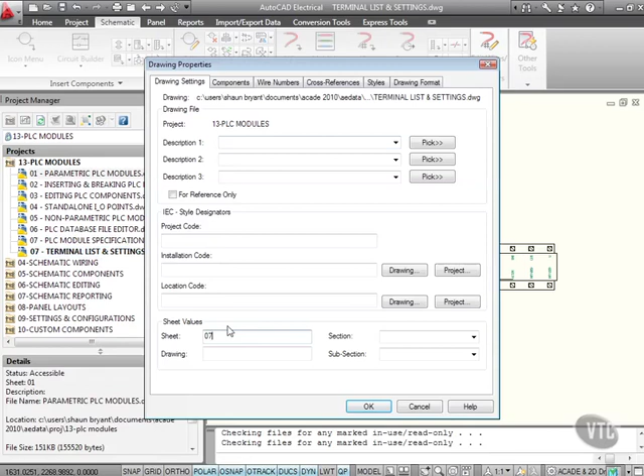When we're developing our own PLC module, we need to look at our terminal list and settings. So we've got a new drawing there. Again, right-click on the project, add active drawing, and yes to project default values. I'll just right-click on it there, properties, drawing properties, and we'll make sure that the sheet value is sequential, and OK that, and the project updates for us.

Now, we need to go back to our schematic tab. And if you remember in the previous exercise, we went to Other Tools, clicked on this flyout here, and went to the PLC Database File Editor. Now, we've already got that AWA that we created in there. And as you can see, it's right there, and I've selected it.

Now, here's our terminals here. Now, we've got 8 terminals to think about. So what I'm going to do, I'm just going to put some very basic terminal information in here, like so. So I'm going to click here, click on the arrow, and then slide up, and I'm going to go for module info input output there, point wire left. I'm going to do the same with this one, but it's going to be point wire right, like so. And then I'm going to do another one here, point wire left.

And I'm just going to keep going now until these are actually all filled in. So it takes a few minutes to do this while I'm clicking away here. So let's think about what we're going to do next. Well, we're going to look at our style box dimensions in a minute, because that positions where these terminals actually go on the block that gets inserted in the drawing. So I need another left there, like so.

And then in this one I need a right, so I'm just going to keep popping these in. And then we've got the last 2 to occupy, like so. So again, scroll up the list, I want left. And then last but not least, we've got the bottom one here. And we scroll up again and we've got right. So those are all added. Now, there could be a spacing factor there. I'm not going to worry about that right now.

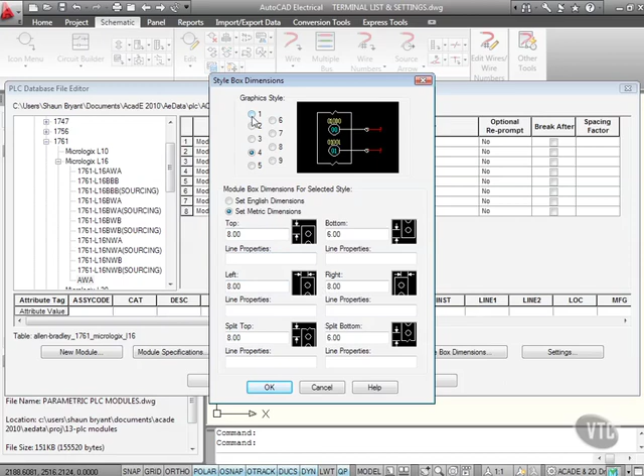What I'm going to do is do my style box dimensions here. Now, I'm going to go for a metric style box. And if I select any of these, can you see that they all have similar properties? So I'm going to leave them as they are. They're not really an issue, to be perfectly honest. So I'll go for graphic style 1 with metric dimensions there, and I'll OK that. So that's all been added. Now, if I hit done and insert, that will basically save what I've done and insert in the drawing.

Let's just check what we're doing here. Module specifications. Well, we don't have a description. We don't have a module type. We've got a code, so what description is it? Let's say it's an AB. Make sure your caps lock isn't on. That'll look a bit silly, won't it? So it's an AB, an Allen Bradley, and we'll say it's an AB

1761. In fact, let's put some underscores in there. It looks neater. So it's a 1761_L16_AWA. I've put all those underscores in there so that we can distinguish it from the actual ones that are already in AutoCAD Electrical. Now the module type we'll just leave as is, I think.

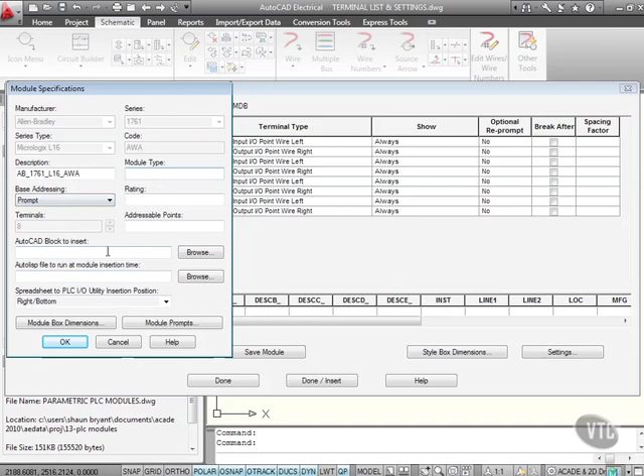Base addressing will prompt for it. We've got a rating, number of terminals. Again, I'm not worried about AutoCAD blocks to insert. I'm going to OK that now, and that's updated as well. So now what I'm going to do is save the module. That has now saved it, and then do a done and an insert. There is my AWA there, and there's my description.

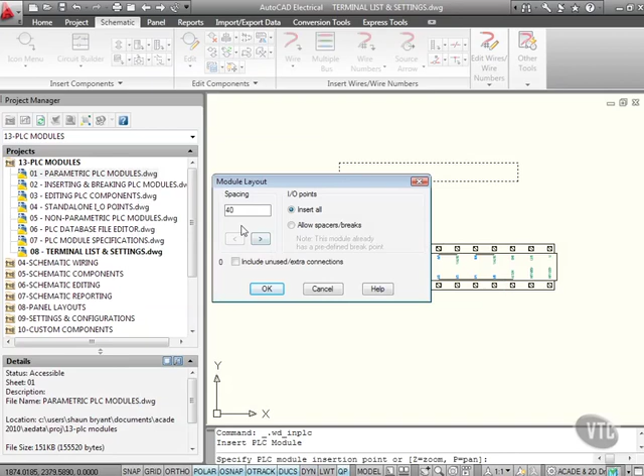So if I now OK that and bring that into the drawing, there's my X there because it's a parametric PLC module. I'll leave the spacing at 40 and OK that. Look. It's all kicking in. If I do that, there they are. I've created my own PLC module, my own parametric PLC module.

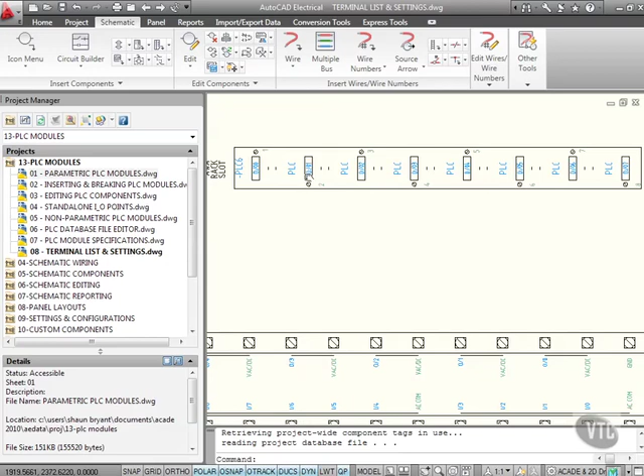If I scroll up now, there we go, look. It's an Allen Bradley, AWA, rack slot, PLC 6 is the tag, and there's all the info. It's all dropped it in for me purely by going in and setting my terminal list and settings. Isn't that cool? Very quick and easy to develop your own terminal list and settings on your own custom PLC module.